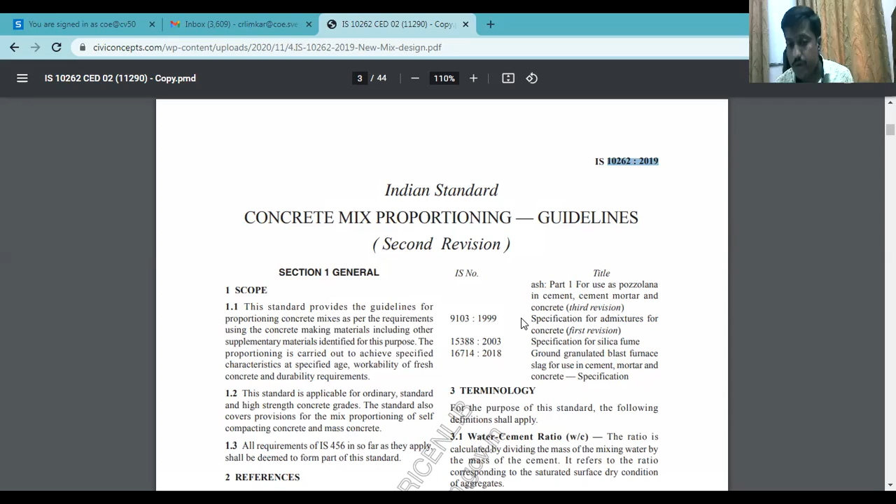Whatever concrete we are going to mix, we have to mix it in a proper proportion. It may be used for footing, beam, slab, or any other structure. There are guidelines given in IS 10262:2019. If you see this IS code, they have set up some rules and regulations for you. Then IS 269:2015 for OPC cement, that is ordinary Portland cement.

IS 383:2016, the latest revision, is for the specification of coarse and fine aggregates. If you don't know it, please go into detail. This is the second, latest revision. Then IS 456, the code of practice for plain and reinforced concrete. Then there are other subparts, some for chemical admixtures or mineral admixtures, and so on.

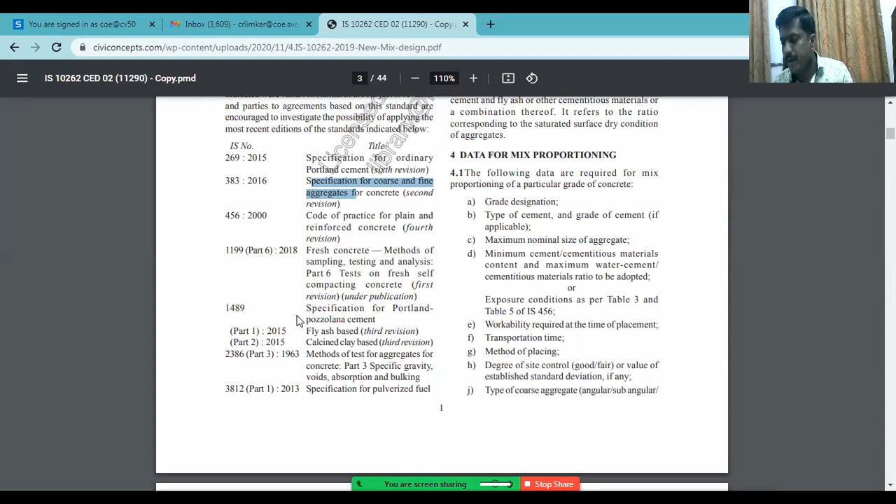Whenever you prepare concrete as per IS 10262, you have to follow the steps given in this IS code. Now one more thing I'll share additionally. Some of you have completed the diploma and know the rate for making a concrete. Every day we deal with many consultancy projects in our college, giving mix designs to different clients like PWD, ZP, private contractors.

We receive their material, test its physical and mechanical properties, and give them the concrete mix design. The cost of completing this process is around 15,000. So if you have a very good hand in preparing concrete mix design, it will help give you your bread and butter. That is why I have directly incorporated this topic, concrete mix design.

If you have a good hand on how to cast concrete and what you need to understand for its preparation, it will help you a lot to understand all the concepts relating to concrete mix design. So rather than discussing the steps in this IS code, I will show you one sample report that we prepared for one of the project sites. Is my screen visible to everyone?

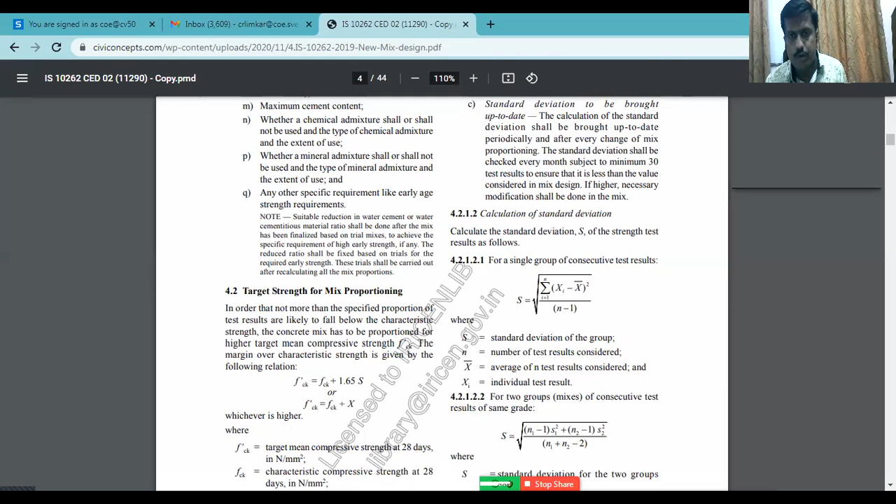Yes. Are you able to see the screen? It's a Word file that I have opened. This is just required for the concrete mix design. Now, along with this mix design, I will also give you some highlights about the questions which are asked previously in the competitive exams.

Okay, so you know this word M40. I will use the pointer. So what this M stands for, what this 40 stands for, what is the grade, what is the meaning of this word grade, grade designation? What is meant by the word grade? Can you define it? What is grade? Every day you are using that language.

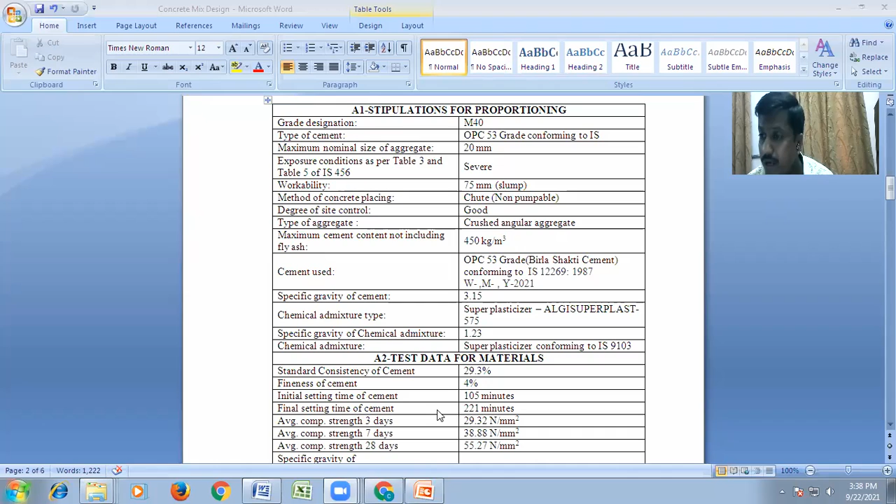It's not directly related to the strength, as you have put in the chat box. Okay, Snell, workability is not directly equal to the strength. Workability equals the easiness of placing the concrete. Again, I am repeating my words. It is the ease of placing the concrete in one of the structures.

It may be column, beam, slab, any structural element. How easily you can place the concrete, how easily the concrete gets compacted. That nature or behavior of the concrete we consider in terms of the workability. Okay, so workability 75 mm. Here is one sample. What does it reflect? If the slump value is 75 mm, what does it reflect?

Whether it's a highly workable concrete, whether it is a low workable concrete, or whether it is having medium workability. And for which structure this value is suitable? That is another question. See, this question is asked again in your competitive exams many times. They will give you the slump value, suppose it's 120, and they will directly ask you the question: if the slump value of the concrete is 120 mm, what is the nature of the workability? Whether it's highly workable, low workable, or medium workable.

Or they can modify it a little bit: what is the suitability of the concrete having 75 mm slump? Whether we can use it for road construction, for building, that is column construction, for footing, or for your slab. So for which structural element does this value suit more? Such type of questions they are going to ask you in the competitive exams.

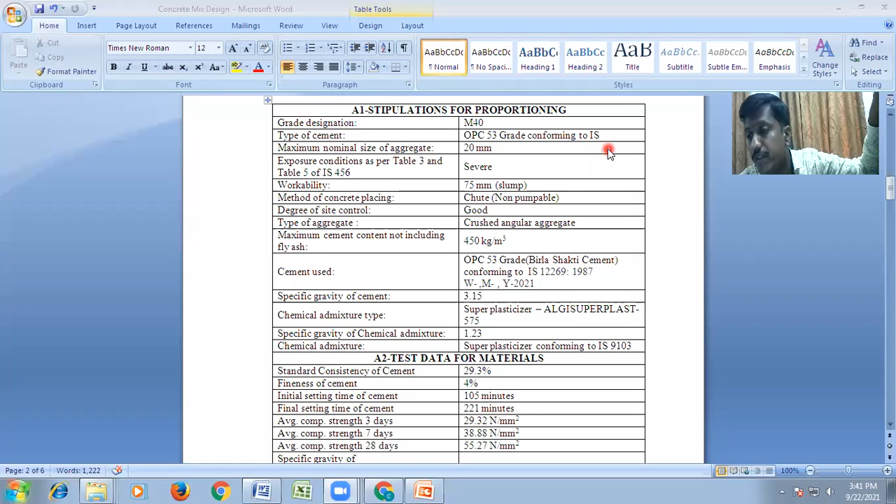Then type of coarse aggregate. Again, there are a number of questions on this point. Crushed angular aggregates. Now you tell me which aggregates are best suitable for the construction work: rounded shaped, angular, gap graded, or uniformly graded aggregates. Which aggregates will you prefer, rounded, angular, crushed angular, or some flaky particles, some elongated particles? What is your thought on this?

Angular. Angular. Okay. It must be crushed or not? It's angular, that is okay, but it must be angular and crushed coarse aggregate. I think all the aggregates now come from crushing plants, so all these aggregates are crushed, but angular aggregates, that is the correct answer. Why not rounded shaped aggregates? Why do we not prefer them?

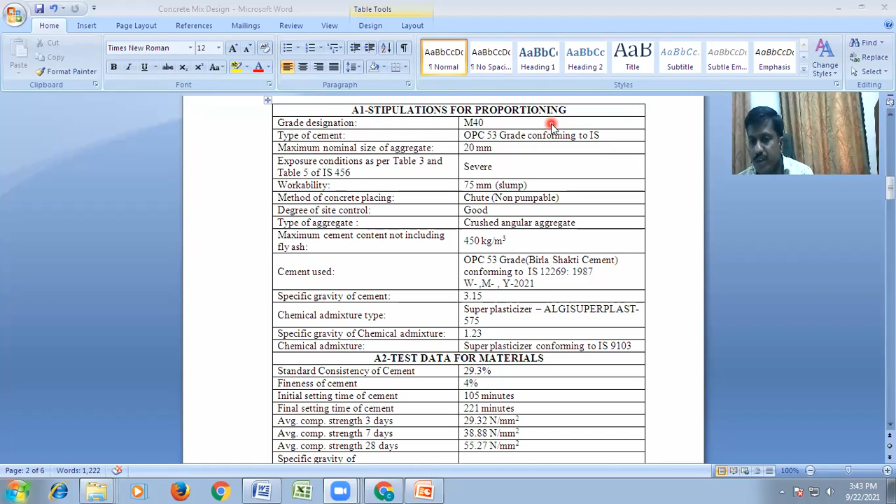And maximum cement content: with respect to IS 456, in table number 5 of IS 456:2000, we have the table which gives the value of maximum cement content, the maximum water cement ratio or the minimum that we need to consider. So for any mix design, the cement content should not be more than 450 kg per cubic meter, that is, it should not consume more than 9 bags. 450 kg means 9 bags of cement. For any concrete mix design, generally, it may exceed in some of the cases.

Otherwise, there are few exceptions for that, but in most of the cases, the maximum cement content should not be more than 450 kg per meter cube. I think that this value is most suitable for up to M30, M40 also. Okay, your cement content should not go beyond 450 kg per meter cube.

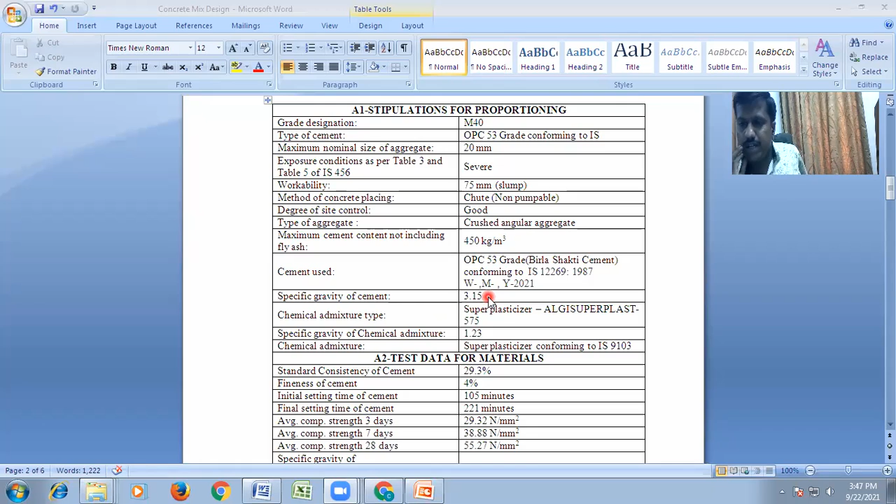What is specific gravity, and what is the specific gravity of PPC cement? In your own language, you can tell. Because not in every case, please remember, the specific gravity of cement remains as 3.15. This is the standard value for OPC cement, but whether it will remain constant in all types of cement, my answer is no. It will definitely change. So specific gravity of PPC is maybe 2.95 to 3, up to 3.05 also in some cases, but it will not remain constant everywhere.

Okay, yeah, density. Specific gravity is the ratio of the unit mass of the material to the mass of the water. In that way you can define the specific gravity. Okay, so specific gravity of PPC cement is always going to lie in the range of 2.95 to 3.05. It does not exactly remain as 3.15. You have to check the specific gravity of cement.

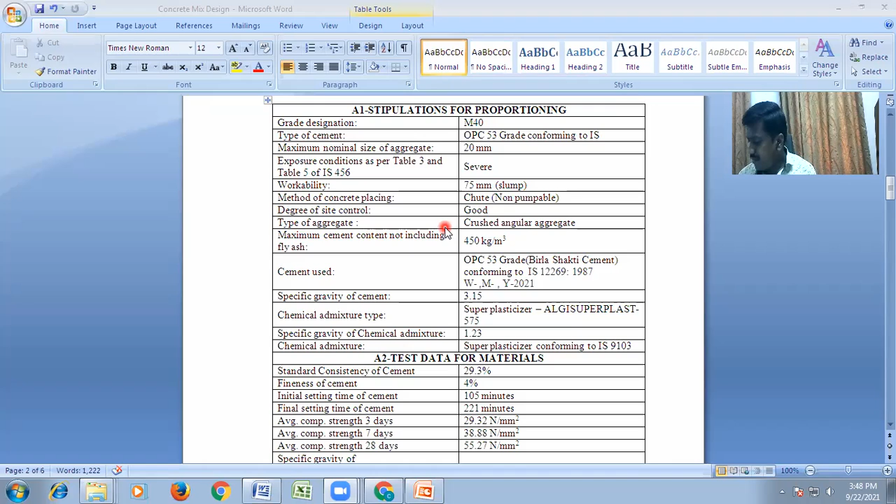How to check it? Which instrument are you going to use to check the specific gravity of cement? Tell me fast. Which instrument can you use to check the specific gravity of a cement? If you get the answer, please tell me which instrument we are using to determine the specific gravity of the cement.

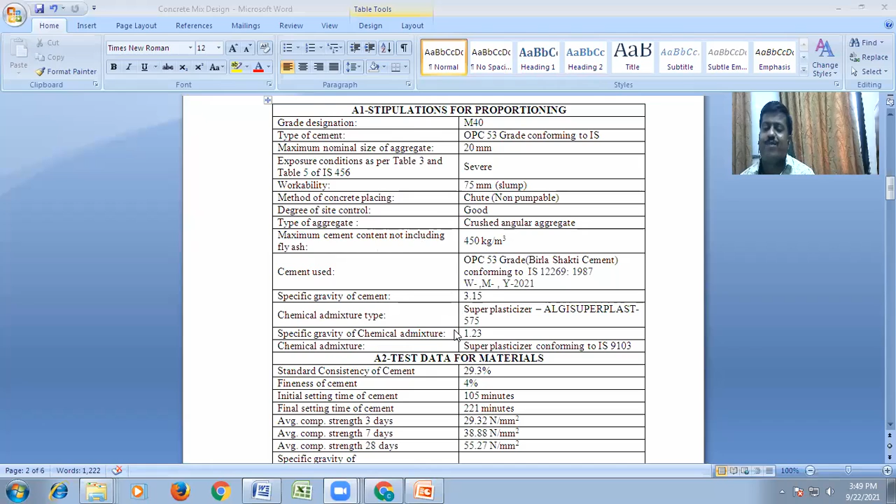Le Chatelier's flask, pycnometer. First answer is correct. Le Chatelier flask method. Le Chatelier apparatus, that is Le Chatelier's specific gravity bottle, we call it. One bottle is there, Le Chatelier's bottle, and using that you can determine the specific gravity of cement. Pycnometer is used to determine the specific gravity of fine aggregates.

One student has written the answer as pycnometer. Pycnometer is used to determine the specific gravity of fine aggregates, not the cement. For determining the specific gravity of cement, you have to use the Le Chatelier specific gravity bottle. Then chemical admixtures, I will take this point in my next session.